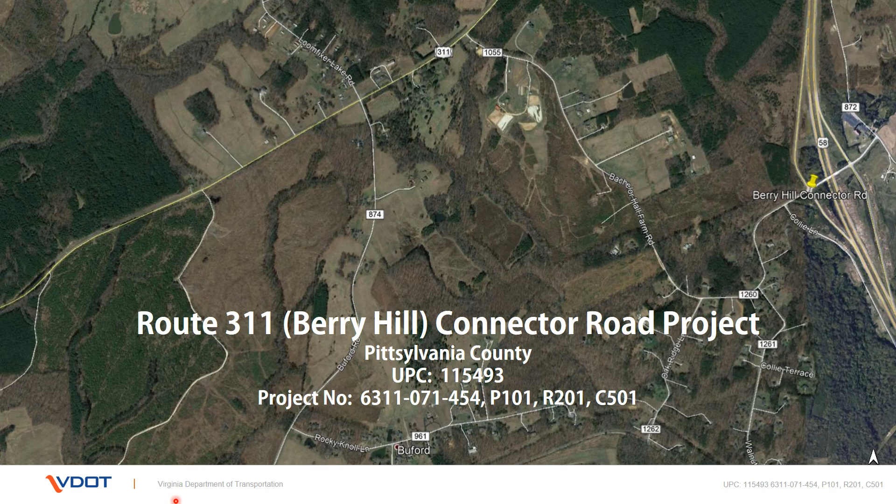Given the unique circumstances of the COVID-19 outbreak, along with our commitment to protecting public health during this national emergency, VDOT is conducting this virtual design public hearing to avoid in-person contact. This presentation will cover the same information that Lynchburg District staff would have shared during the in-person meeting. However, the comment process will be different. Details on how to submit your comments and have your questions answered will be covered later in this presentation. All project information can be found on VDOT's website, www.virginiadot.org.

The virtual design public hearing has been convened by the Virginia Department of Transportation and is being held to receive and consider comments for the Route 311 Berry Hill Connector Road project. You may have attended previous public hearings conducted by VDOT. However, for the benefit of those who have never attended one, I would like to explain why and how VDOT conducts a public hearing. A public hearing has four essential purposes. First, to inform the public on the status of the planning of the project and to present the recommendations based on the design to date.

Second, to describe the project so that those attending can determine if the project will affect their lives and property. Thirdly, to provide the public an opportunity to see information and express their views at this stage in the planning process when flexibility to respond to comments still exists before design decisions are finalized. Lastly, this hearing is also used to develop a record of public views and participation to accompany recommendations for subsequent decisions. This virtual public hearing is being held in compliance with state laws.

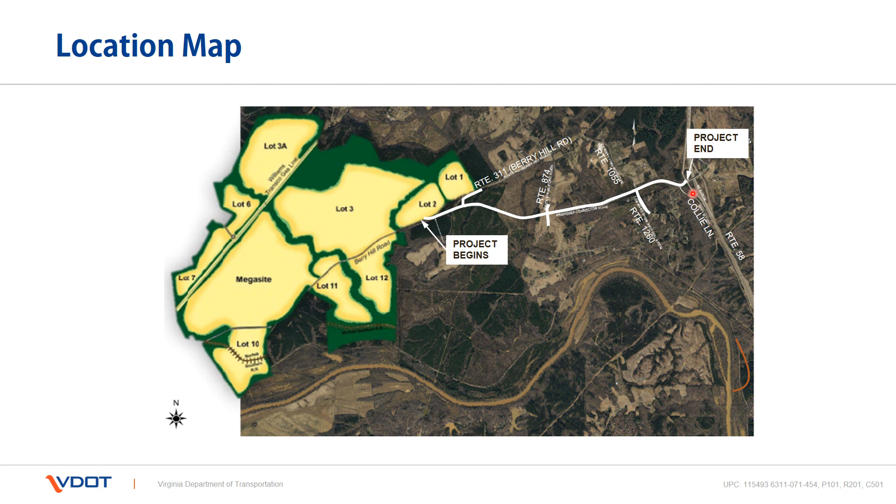The ultimate design condition is to provide a 4-lane divided highway with a concrete raised median approximately 16 feet wide. The current design will present a typical section that serves present-day needs while designing for future improvements.

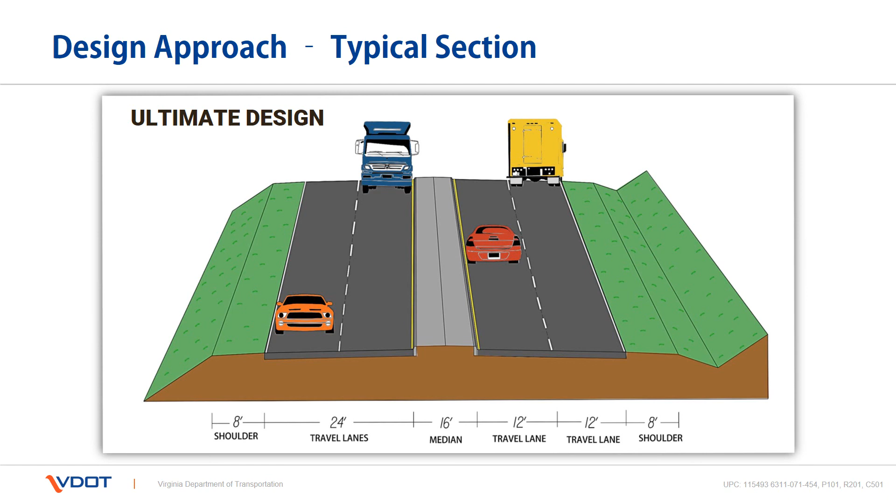The current connector road typical section will build two 12-foot lanes with 8-foot wide shoulders, one in each direction, that will later serve as the eastbound lanes in the future, and will grade for the westbound lanes. This allows for the installation of infrastructure that can be modified in the future that will mitigate future environmental impacts to existing streams and wetlands and surrounding properties.

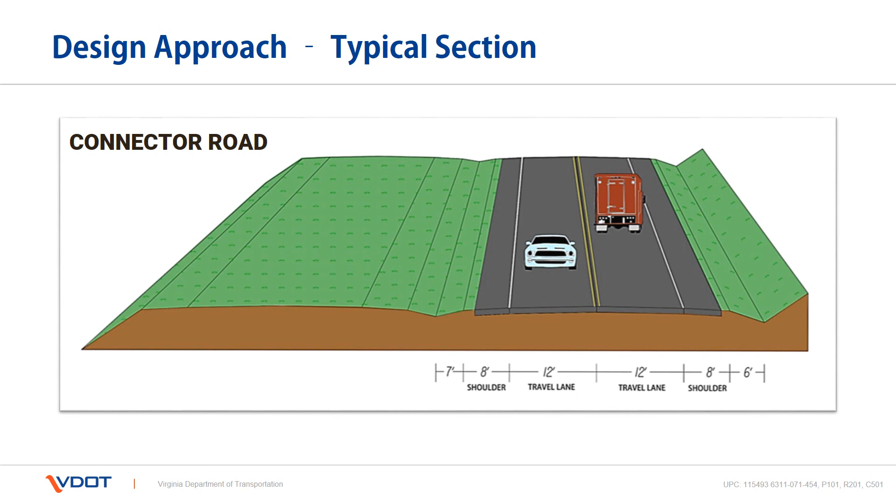There are 5 secondary roadways that will be redeveloped to provide a cohesive connection to the new connector road's horizontal and vertical alignment. The typical section for Route 874 Buford Road, Route 1260 Oak Ridge Farm Road, Collie Lane, and Route 1055 Bachelor Hall Farm Road will consist of two 11-foot lanes with 5-foot wide shoulders.

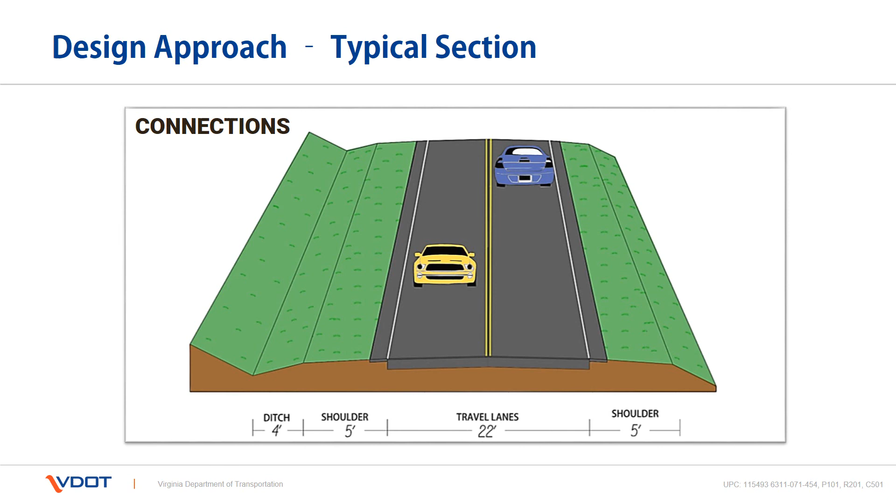The next few slides will represent the plan view of the corridor. After reviewing each plan view, I will zoom in to allow for a closer look. As we review the project, I will highlight significant aspects of the design. Beginning at the intersection of Route 311, the connector road will tie into the existing 2-lane section, and as we travel eastward, the pavement width will begin to widen to accommodate the new Route 311 connection to the connector road.

At this intersection, the design will incorporate a right turn lane in the westbound direction to allow for free flow movement onto existing Route 311. The through movement from Berry Hill will continue to the 58 bypass rather than intersecting with Route 58. Additionally, approximately 1,150 feet of existing Route 311 Berry Hill Road will be abandoned and obliterated.

Continuing eastward towards Route 874 Buford Road, the horizontal and vertical alignment along Buford Road has been designed to improve the overall function of the roadway and to provide sight distance at the new intersection of the proposed connector road. These plans feature several culverts and stormwater basins. The storm sewer system was designed to meet the 10-year design storm event.

The culvert crossings were designed to ensure that impacts to the 100-year water surface elevations were minimized to protect adjacent and surrounding properties. Throughout the development of this corridor, there are several stream crossings and multiple outfalls. Therefore, the management of stormwater, both quantity and quality, became a critical part of the design and was of utmost concern.

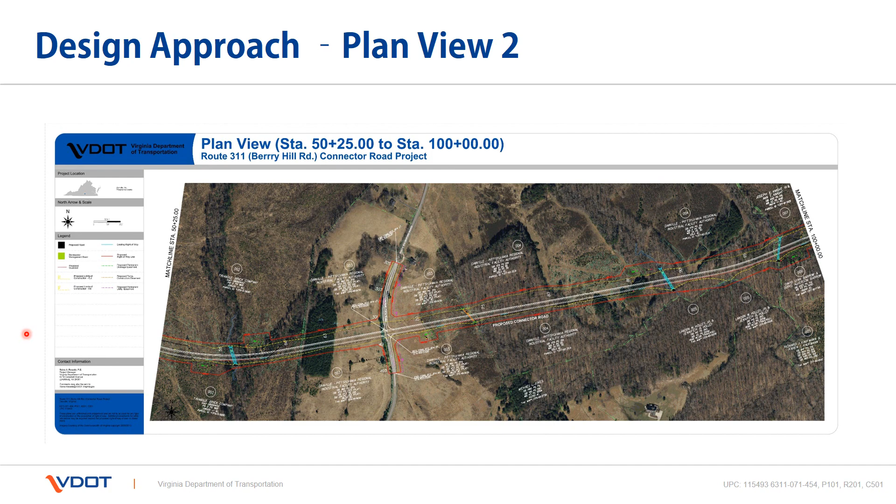Continuing along the corridor, we have the extension of Route 1260 Oak Ridge Farm Road to provide the new ingress and egress to the connector road while closing the existing connection to address the spacing concerns and the close proximity to the existing interchange ramps. A cul-de-sac will be provided to allow residents, school buses, and emergency vehicles an opportunity to successfully turn around within the subdivision.

During the location public hearing held on June 6, 2019 at Roseville Elementary, we received several comments from the residents along Route 1055 Bachelor Hall Farm Road to not connect Bachelor Hall Farm Road to the new connector road. Presently, the main ingress and egress to Bachelor Hall Farm Road is off of existing Route 311. Therefore, a cul-de-sac has been incorporated at the end of Route 1055 to allow residents, school buses, and emergency vehicles an opportunity to successfully maneuver within the subdivision.

As we begin to arrive at the Route 58 connection, as previously stated, the existing Oak Ridge Farm Road access will be obliterated and a cul-de-sac installed. Collie Lane shall tie into the connector road to serve those residents. Throughout this section of corridor, there are significant fill slopes that will require guardrail. These plans also reflect the proposed right-of-way and utility easements necessary to develop the connector road.

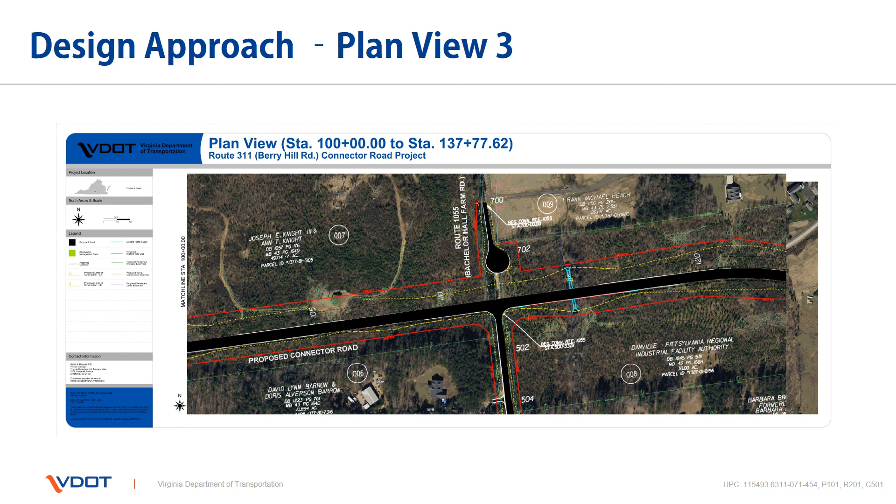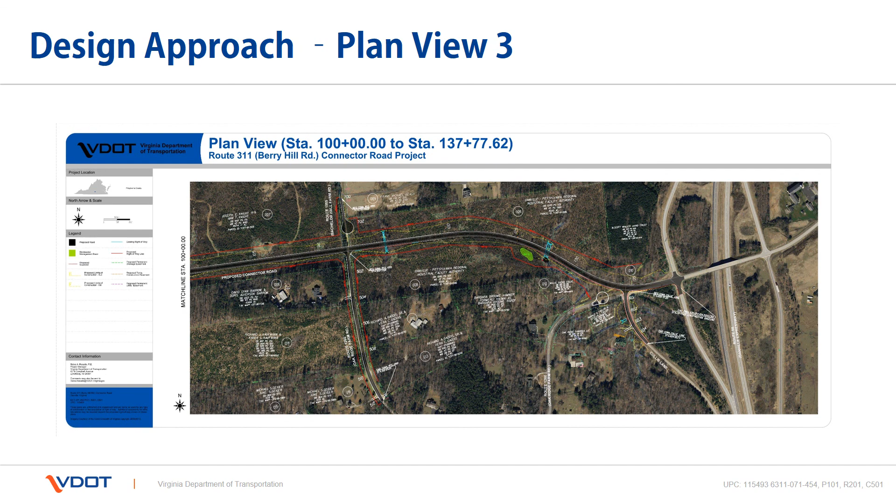Technical documentation for this project addresses the potential environmental impacts identified in the preliminary engineering process. These areas of consideration include archaeological resources, historic resources, wetlands, waters of the U.S., biological resources, hazardous material, and the State Environmental Review Process, also known as SERP. In addition to the other items listed above, the State Environmental Review Process has been completed for the project. The following slides will include a brief summary of the findings.

The William and Mary Center for Archaeological Research conducted an archaeological survey of the environmental project corridor associated with the proposed construction of Berry Hill Connector Road in Pittsylvania County. The investigation was intended to provide specific information concerning the nature and the distribution of archaeological resources within the proposed project corridor.

The project corridor occupies an area of approximately 109 acres and consists largely of mature and secondary growth forest, farmland, and rural residential properties. Field work involved systematic pedestrian survey of the project corridor, including both surface examination and shovel testing. Archaeological and architectural surveys are complete.

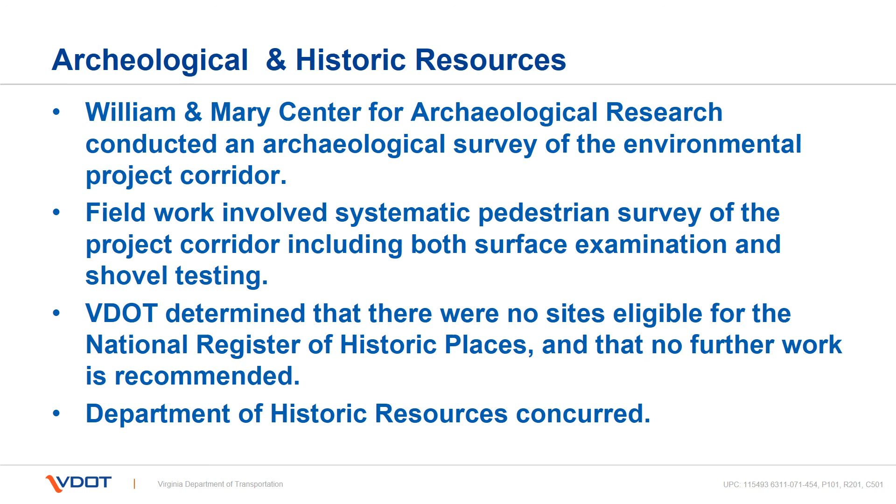VDOT has determined that all newly discovered sites and archaeological isolated finds are not eligible for the National Register of Historic Places, and that no further work is recommended. The Department of Historic Resources concurred on May 13, 2020.

The project has 15 stream and wetland crossings impacting Childress Creek, tributaries to Childress Creek, tributaries to the Dan River, tributaries to McGuff Creek, and associated wetlands. The total permanent stream impacts are 1,915 linear feet and 360 linear feet of total temporary stream impacts. Total permanent wetland impacts are 4 acres and 0.96 acres of temporary wetland impacts.

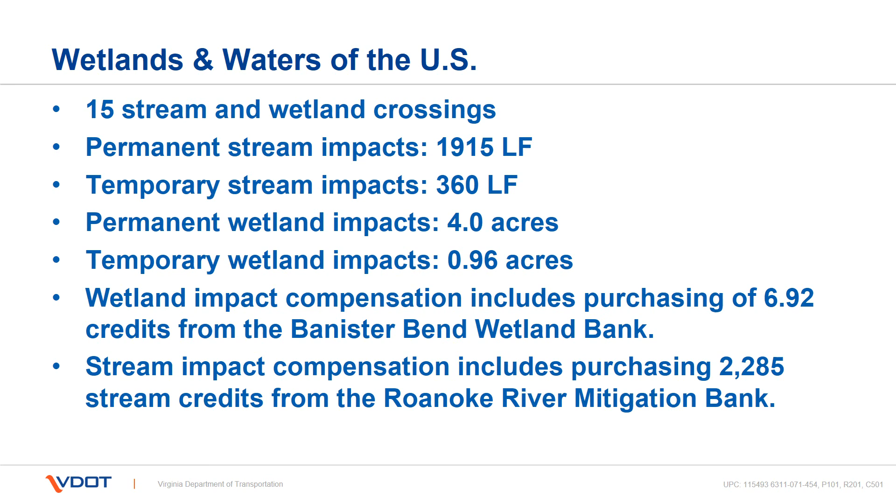Wetland impact compensation includes purchasing of 6.92 credits from the Banister Bend Wetland Bank. Stream impact compensation includes purchasing 2,285 stream credits from the Roanoke River Mitigation Bank. The Dan River is listed as threatened and endangered waters for the following species of mussels: James spiny mussel, green floater, and the Atlantic pigtoe.

The freshwater mussel site habitat assessment was performed along Childress Creek and its tributaries within the project area. No mussels were seen, live or shells, and no potential mussel habitat was identified. Based on observations made during the assessment, it is unlikely that this project will impact any native freshwater mussels in Childress Creek, its tributaries, or the Dan River downstream from the project. The Department of Wildlife Resources concurred on March 18, 2020.

The presence of the northern long-eared bat was identified in the project's official species list. Tree removal is required as part of the project and is listed as an activity that may affect the northern long-eared bat. There are no known hibernacula or roost trees in the project vicinity.

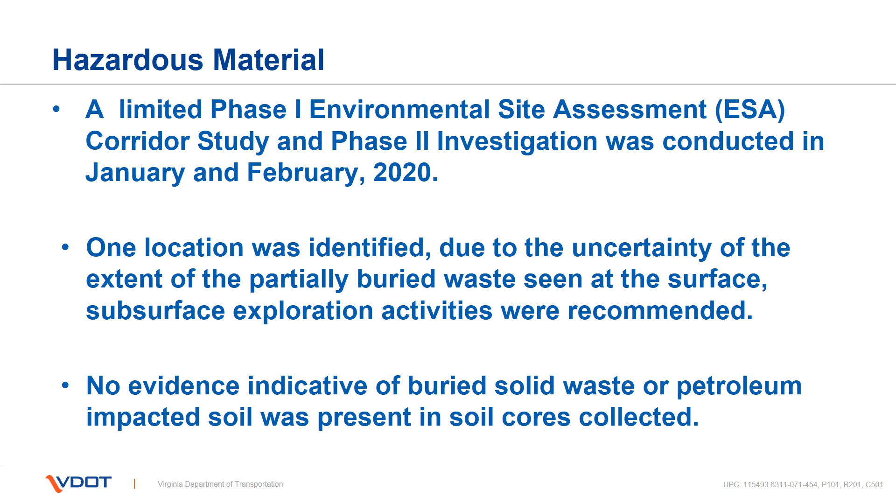In January and February of 2020, a limited Phase 1 environmental site assessment corridor study and Phase 2 investigation were conducted, respectively. The Phase 1 environmental site assessment corridor study assessed potential recognized environmental conditions within or adjoining the environmental study area that may affect construction methods, design, or cost of the proposed improvements. One location was identified due to the uncertainty of the extent of the partially buried waste seen at the surface. Subsurface exploration activities were recommended. No evidence indicative of buried solid waste or petroleum-impacted soil was present in soil cores collected in the vicinity of the recognized environmental condition.

Let me provide you now with information regarding the anticipated right-of-way for this project. There will be approximately 50 acres of proposed right-of-way needed for the Route 311 Berry Hill Connector Road project. The right-of-way will be acquired from numerous properties along the east and west sides of the project corridor. No businesses, residents, or non-profit organizations will be displaced as a result of this project. All right-of-way acquisition will be completed in accordance with the Uniform Relocation Assistance and Real Property Acquisition Policies Act of 1970, amended in 1987.

The acquisition of necessary rights-of-way for this project will be handled by VDOT. All proposed acquisitions will follow federal and state laws and VDOT policies and procedures. The Uniform Relocation Assistance and Real Property Acquisition Policies Act of 1970, known as the Uniform Act, is the federal law that is followed for appraisals, negotiations, and relocations of families and businesses.

Each property will undergo a valuation process to determine the fair market value for each acquisition. During negotiations, the landowner will receive a copy of the acquisition valuation, a title examination, a bona fide offer in writing for the acquisition, along with all pertinent construction plan sheets. The VDOT negotiator will communicate with the landowner to ensure all questions, comments, and concerns are addressed.